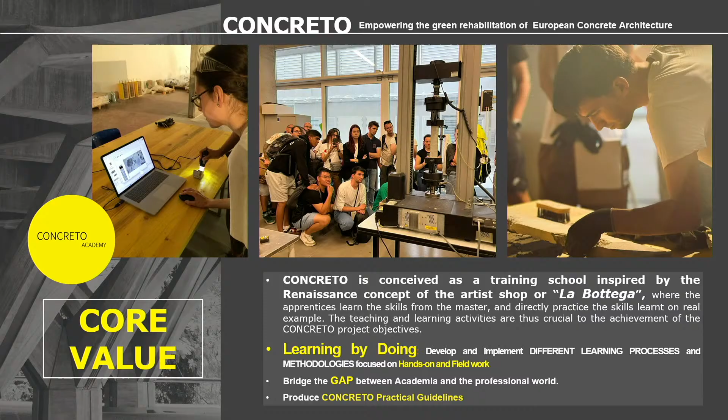The background, as Elisabetta and the previous speaker, who gave a really nice welcome, hinted, is why we decided to develop this project. On one end, we were moved by the safeguard and protection of modern architecture, modern heritage. On the other hand, responding to urgent European policy to renovate and work with our existing built environment, and simply because we have a very large portfolio of concrete buildings and concrete infrastructure that are getting older and are in need of our help.

Nobody can deny that this unique man, the work of Pierluigi Nervi, has indeed been one of the main inspirations of this project. It certainly brought me back to Italy from the US to work on Nervi, so I think for me, it did the trick. Nervi left us an incredible legacy.

The foundation was established in 2008 by Marco Nervi, who is hiding in the audience - we will point him out in a little bit - and indeed Elisabetta. Over the past two decades, they've really worked hard to promote, protect, and preserve Nervi's work, but not only that.

Since we are in Spain, I couldn't resist honoring and showing my admiration for another great visionary and engineer, Eduardo Torroja. It's a very hard pick. When yesterday we went to see the Ippodromo La Zarzuela, I really felt I was cheating on Nervi a little bit, because it's really hard - genius at the same time, but in different ways. Definitely they have both contributed to our concrete architecture in incredible ways.

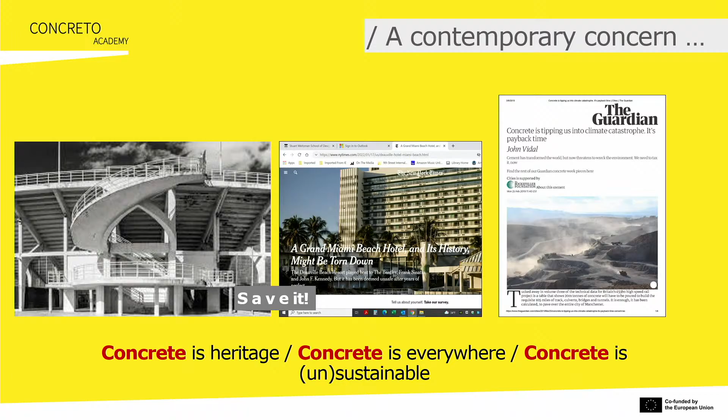Despite the great progress we have achieved in the last 200 years since the introduction and patent of Portland cement, which we celebrated in 2024, concrete technology has advanced greatly as a material that has really allowed us to build our cities significantly. But it's still very disappointing when we look at the stats on how we are doing with our interventions in terms of repair, durability, and performance.

I think in this audience we can fairly say that we can split the blame a little bit between the design professionals and the people that actually do the work in the field.

For this reason, we reflect that working with this material, although very economical and very versatile, requires a very specialized set of skills. It's artificially made, it's made in the field, which on one end gives us incredible opportunity, but on the other really underlines - and is always a good reminder - that it relies a lot on the quality of craftsmanship. So it's very important, as we are faced with intervening in this architecture, to think about these types of specialized skills.

So here we are - after this bit of background, this is what has really been the goal behind this project: to bridge the gap between practice and research, to give a practical approach, to show how things are done, to allow professionals that specialize in designing intervention to really have an opportunity to see what it takes to do a patch repair, which is still today quite a challenging task.

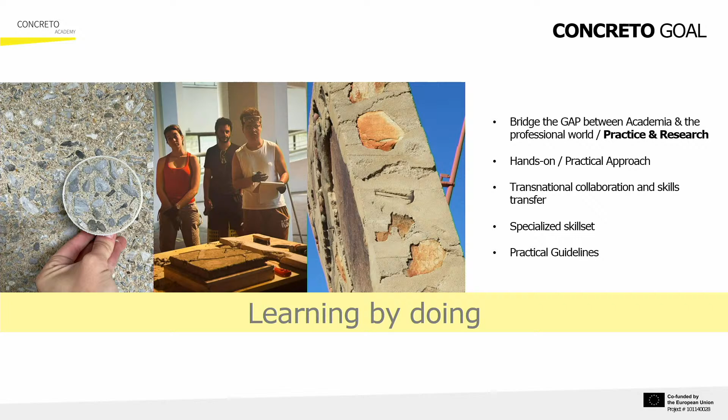All the teaching and training activities of Concreto revolve around what we call the 5 skill pillars of knowledge - the A to Z of what it takes to work with existing concrete structures, starting from concrete assessment and then moving along, touching upon all the different types of techniques.

Who participates in this, who takes part in this project - they're all sitting in this room. There are students from architecture and engineering schools. There are students from VET organizations, craft schools, who are going to be the technicians in the field of tomorrow. And then there are young engineers and young architects who are already working in the field.

The Concreto journey, as we refer to it, is a one-year program. We are not meeting every day - it's not a continuous 360-degree concrete full immersion. We have 3 appointments during the year. We start with an online introductory training where we first get to know one another, and introduce some of the big challenges and main topics through case studies. This year we started in January. Then we are here now.

We are about to complete our Master Your Skills, the 8-day hybrid learning. Last year we were hosted by our partner in Milano, at the Polytechnic of Milan. This year we're here in Madrid.

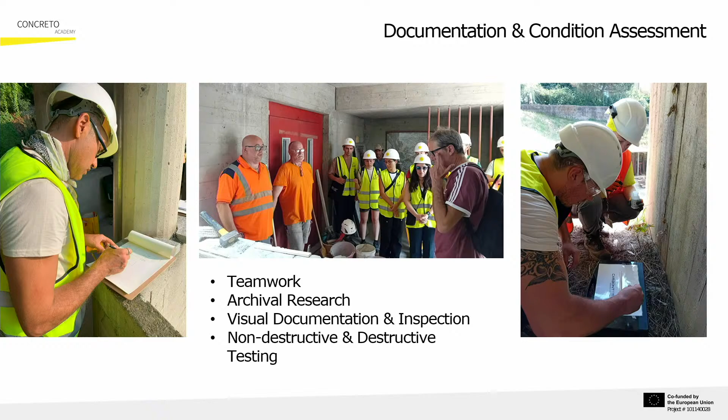As we mentioned, the activities are all hands-on, all field activities. These are some photos of the work they did at the building. They start from archival research, and then they were assigned different parts of the building to identify how it was built, continuing with some of the most common diagnostic testing usually done when working with concrete.

After spending a week in the sun, we brought them back inside in the laboratory with no air conditioning, where we started going through the basics of how concrete works and making some concrete - what it takes to change ingredients, and how difficult it really is to work with this material.

We also put Marco to work, as you see here. We had to have a kind of blessing from a Nervi before we really got going.

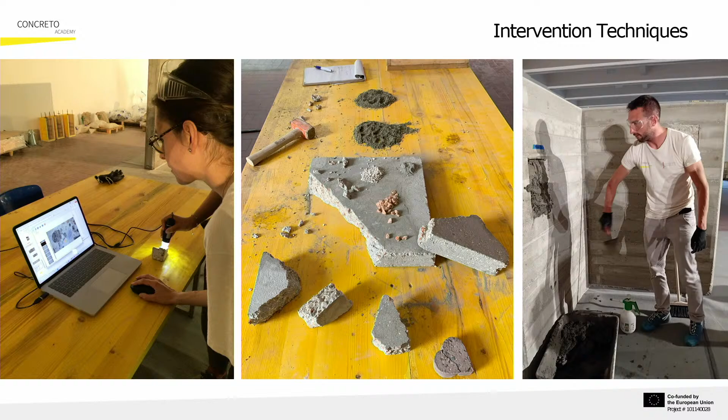These are some additional exercises dealing with how to match and work when replicating historic concrete. Here we have Matteo trying to perform a patch repair, which I think he can now confirm was not a really easy task.

We also touch upon electrochemical techniques and so on.

So in the end, the sustainability of this project - it's a 3-year project, we are in the 2nd year, with one more year to go. As an end goal of these 3 years, we have the publication of practical guidelines referring to different types of intervention and assessment for concrete, and also the production of short online massive open online courses that will be on an open source platform. The future is also to continue, to be able to independently continue this as a training institute.

We should maybe mention the code book that will be coming out. Yes, we are also very, very close to publishing one of the first products - a research state-of-the-art and literature review that was done from the start of the project, trying to really understand the gaps, what we are doing well, what we are missing. Of course we have to call out Guido from Docomomo, because they were leading this effort and have done a really great job.

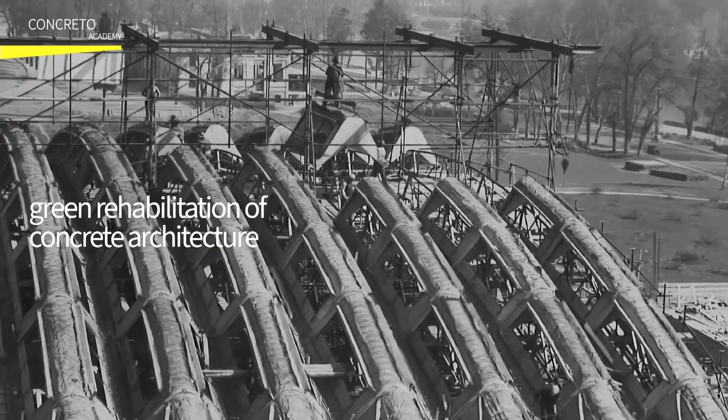Concreto is an alliance for enterprises and education project under the Erasmus Plus program, launched in January 2024. Led by the Pierluigi Nervi Project Foundation, the Concreto Consortium includes 13 partners from Italy, Spain, Belgium, the Netherlands, and Turkey, comprising higher education institutions, vocational training organizations, national trade associations, and modern heritage organizations. The project draws inspiration from Pierluigi Nervi's architectural legacy and focuses on developing skills for the green rehabilitation of concrete architecture.

Inspired by the Renaissance idea of the artist shop, La Bottega, Concreto is conceived as a training school combining theoretical learning with hands-on practical experience. Each year, Concreto brings together university students, craft workers, and young professionals to learn and collaborate, aiming to bridge the gap between academia and the professional world.

Concreto identified 5 skills pillars of theoretical and practical knowledge for professionals to master when engaged with the rehabilitation and regeneration of our concrete buildings. The teaching and training activities are organized in 3 sequential units around these 5 skills pillars, as Concreto workshops intended to link education with practical sessions.

Starting with the Concreto Stepping Stone, then followed by the Concreto Master Your Skills, and ending with the Concreto Masterpiece, the final summer school with 100% hands-on fieldwork experience, which will take place at the UNESCO site in Ivrea, Italy. The Concreto Academy supports a two-way approach of principle and practice, promoting smarter and greener renovations to ensure the safeguard of our concrete quality architecture.

The Concreto Academy seeks to equip today's professionals with the skills needed to become tomorrow's experts in sustainable building practices. And remember, our European concrete quality building stock is a non-renewable common good, whose preservation and empowerment are the responsibility of society as a whole.

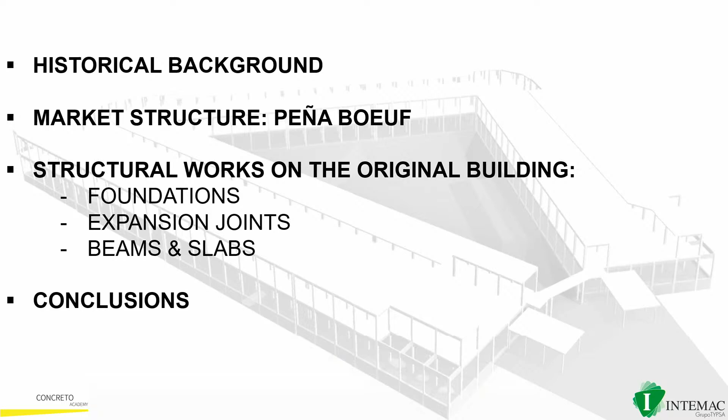We have to go to Madrid in the 1920s, 100 years ago. You've been 8 days in Madrid, so you already know where Puerta del Sol and Atocha are. In the south of Madrid it was still a suburb, and the city council decided to build wholesale markets where neighborhood markets could buy their products. The most known of them is the slaughterhouse, the Matadero, which you've probably visited, close to the river.

Close to it, there was a site of the city council with a triangular shape because of the railway tracks, and it is here where the council decided to build the market.

The Matadero had been built in a regionalist style, using stones and bricks to make arches, etc. But the architect, Javier Ferrero, decided to change this completely, and he used concrete to build the new market. He also decided to use the space in a very functional way, placing all the buildings on the edges of the triangle, leaving a huge square in the center where sales could be done.

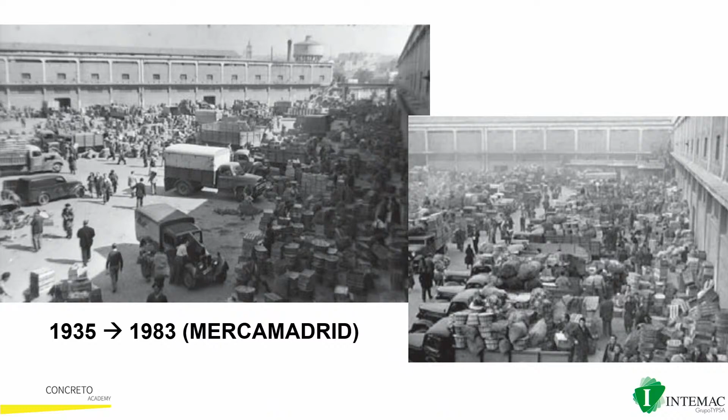It was in use from 1935 until 1983, when a bigger market, Mercamadrid, was built. From then until the beginning of this cycle, it was abandoned, and many damages and problems arose. The city has been growing, and now that suburb of the 1920s is a center of leisure and culture in Madrid.

I already mentioned Matadero, but there are other places for leisure and culture too. So it is important that this building have a use. It is very important because I live here, so it's good for me.

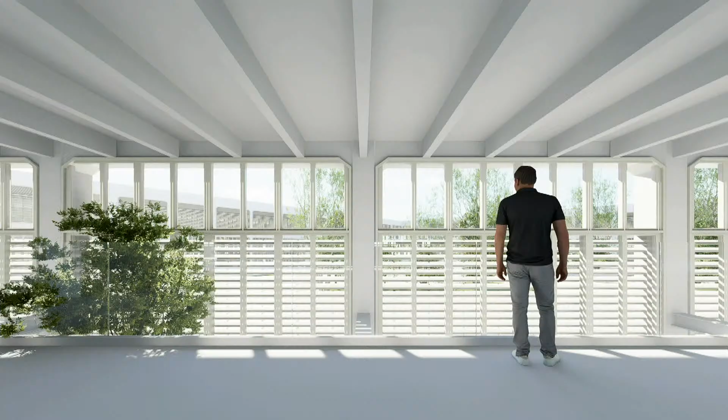The idea of the project is to maintain Javier Ferrero's concept of the great square in the center and the buildings on the edges. Here are some views of the rehabilitation now in course, and as you can see, the structure is maintained, the same as it was 100 years before. Some views show the new uses as well.

A question arises: it will cost 100 million euros. Somebody could ask if it is worth this investment. I have no doubt, and in this context nobody doubts, because of the sustainability and heritage values that this building and this architecture have.

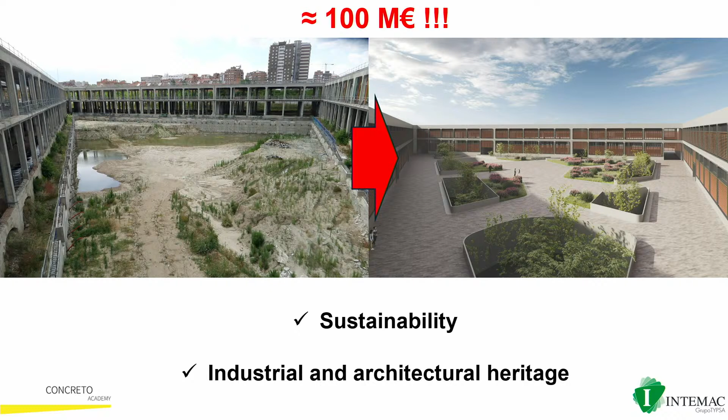But let's go to the structure — we have to go back to 1931, when the market was designed. It is interesting to see that although concrete was already a consolidated material, the structure is very similar to those of Hennebique from the end of the 19th century, with those frames, the forms where they meet the column, rib slabs, etc. They are very similar structures.

Of course, those patents had already been surpassed, and structures like those of Freyssinet or the roofs by German engineers had already been built. In fact, Le Corbusier had published on the new architecture and concrete, and had embraced concrete also for architecture.

In Spain, the situation was quite similar. At the beginning, we used patents mainly from France — Ribera was the engineer who introduced most of them. And from 1910, concrete was taught at the school, at the Polytechnic of Madrid.

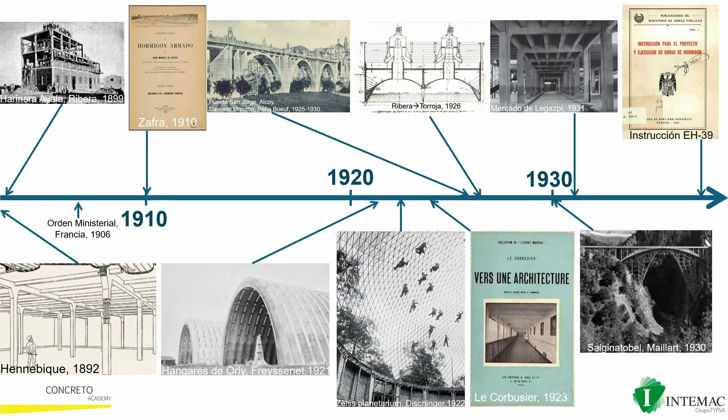Alfonso Peña, that I mentioned before, was a civil engineer. He had teachers like Zafra, who was the first teacher of concrete in the Politécnica de Madrid. And when Zafra died, he took his chair of concrete. He published many books that have been a reference for many engineers in Spain, but he didn't have many projects, though he imagined many projects.

He wasn't known for it, but he was a dreamer. It surprised me when I studied him for the first time that, for example, in the 1930s, he already dreamed of a bridge over Gibraltar, which surprised me. Another interesting fact about Alfonso Peña is that he was the Minister of Public Works in Spain after the war.

Today, Carlos Polimón, who is an expert in bridges in Spain, is not going to speak about bridges, so I'm going to tell you about a curiosity of Alfonso Peña: in 1932 he designed an aqueduct in the north of Spain, in Tardienta, but his partners didn't like the design, and they had doubts about its security.

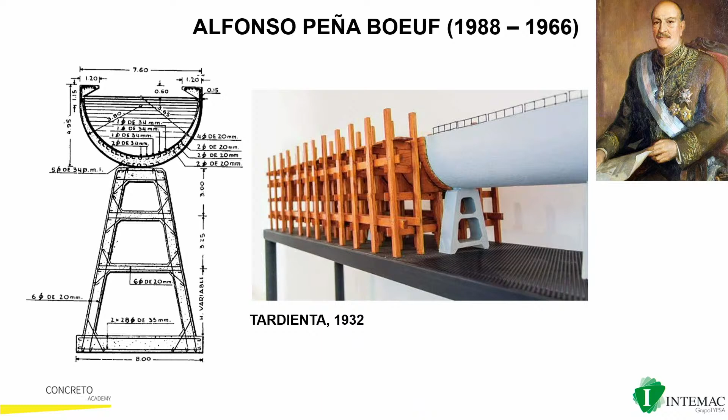He made models to prove that it was correct, but because of the war, this project was stopped. After the project resumed, they made some proof loading and checked they were right, so they could build the aqueduct, and it was the Minister who inaugurated his own work, which never happened in Spain.

This structure is very similar to that of Torroja, at Alloz. This other one is much more elegant, but maybe Alfonso inspired Torroja in the beginning.

Let's go back to the market. It's a structure, and as you can see, it is very robust, mainly in the central corridor where vehicles had to go to distribute the fruit or whatever. In the roof, there were these canopies, which are 6.5 meters - it's quite a lot.

In fact, the first time I had to check the structure, I didn't know how it worked, because I didn't think an engineer then could design this by torsion. But it wasn't like that - he designed many reinforcements by torsion to resist this canopy.

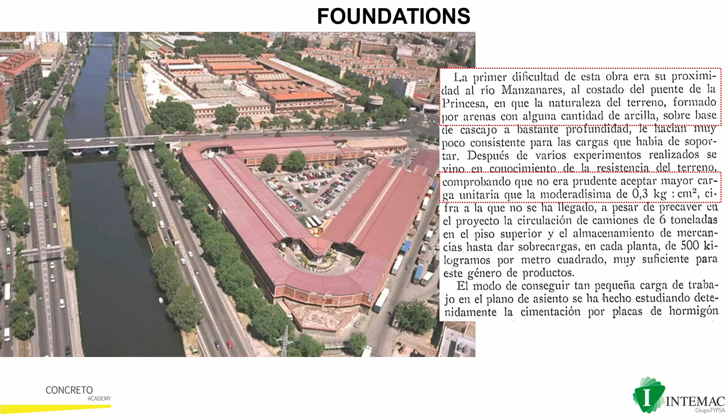But the main problem of the market for which the restoration has been carried out is the foundations. As I mentioned before, and as you can see in this picture, the market is close to the river. Alfonso Peña knew the soil was not so good, and in fact he designed troncopyramidal footings so that the tensions in the soil were low enough.

Despite this precaution, many damages appeared in the facades and also in the structure. I don't want to be very technical, but I can't resist explaining some of these damages.

For example, these ones. As you know, at the end of a frame, you have negative moments that compress the bottom part of the section. So in the beginning, it is not necessary to have any reinforcement in the bottom side. But every code recommends or establishes that you have to put a quarter of the reinforcement of the bottom into the column. This is because you can have a change of the moments, for example, because of settlement.

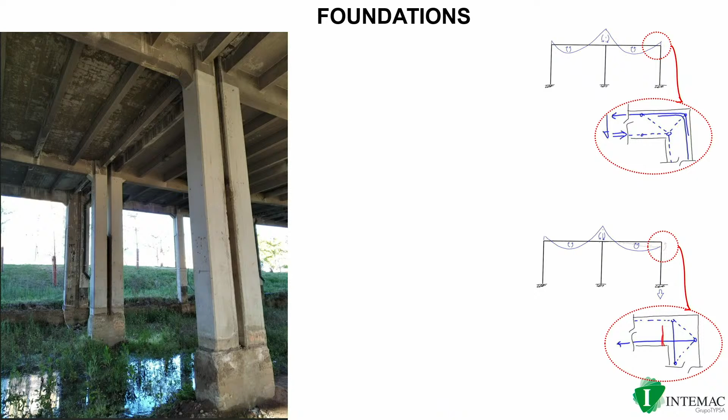And here it's clear: if you have a settlement, positive moments will tension the bottom reinforcement that you need at that point. If you don't have it, or in this case you have it but it's not enough, great cracks appear, and they had to be treated.

Because of this kind of damage, and because of the new uses and new floors in the market, underpinning had to be done in all the foundations. It was decided to do it by micropiles, and the problem of this kind of intervention is taking the loads from the column to the micropiles.

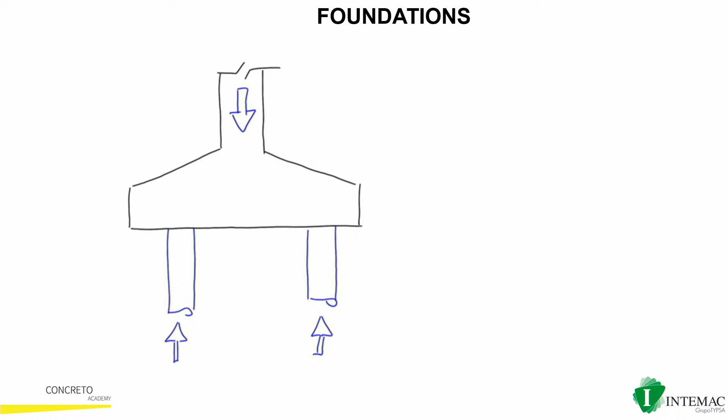In the beginning, if the loads are not too big, we can do it inside the existing footing. It means we have to check that the bond between the micropile and the footing is high enough, and that the tensions generated in the footing are also low enough. This was not the case in most of the footings of the market, so another solution had to be found.

As there was no problem of height over the footings, we decided to make caps over the existing footings. But the problem is the same: we have to take the loads from the column to the micropiles. And to do this, we have different mechanisms.

The first one is just shrinkage. Because of shrinkage, there will be compressions against the column, and this will improve the bonding between the column and the cap.

If we don't trust in this shrinkage, we can analyze the reinforcement. We can place it analyzing shear friction, which means that when the column tries to slip inside the footing - the cap, in this case - the reinforcement will be in tension, which means there have to be compressions against the column, okay?

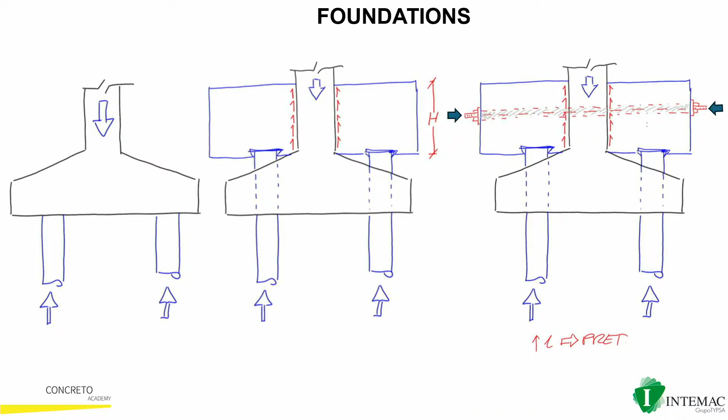If not, another solution is to pre-stress that cap. And this is the only solution in the case of the facades, as you can see here. I don't know if you can see the point, but here is the existing footing, and this is the new cap that is pre-stressed, so that there is compression that improves bonding.

This solution was also used in the interior columns. Here you can see the execution of the micropiles, the placement of the reinforcement, concreting, and then pre-stressing.

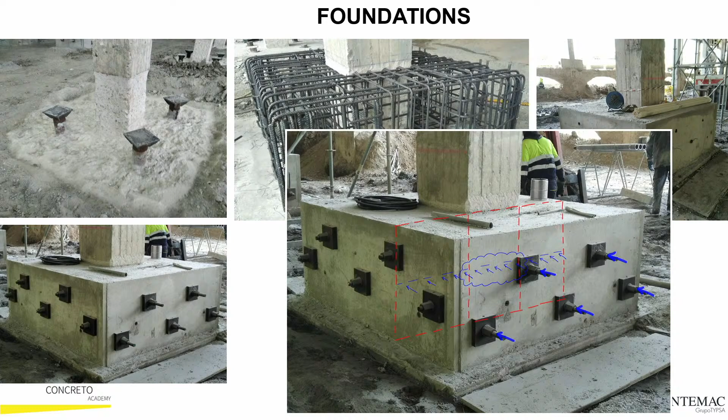Here another gap arises, because once you pre-stress, you don't know what you are pre-stressing. What you want to do is to pre-stress the cap against the column, not the cap itself. But, well, they decided to do this, and as other mechanisms work, it's easy enough for us.

These interventions meant 15 million euros. It is a lot, but it is not so much if we compare it with the amount that the Council wants to save because of the booking or renting of other buildings. All the people will come here and they won't have to rent other buildings. Another interesting intervention was the closure of the joints, which was a problem in the market.

Here you can see two cases of joints that were very badly resolved, and in fact it's difficult to understand how this didn't fall before. Probably because these beams were supported by other elements, probably facades or something like that.

In other cases, in most cases in fact, expansion joints were resolved by doubling columns, and the configuration was right, but because of the problems of the foundation that I mentioned before, there were some cracks.

In both cases, we decided to eliminate the joints and change the structural behavior, placing new reinforcement on the top side of these elements, so that this new reinforcement will work against new loads.

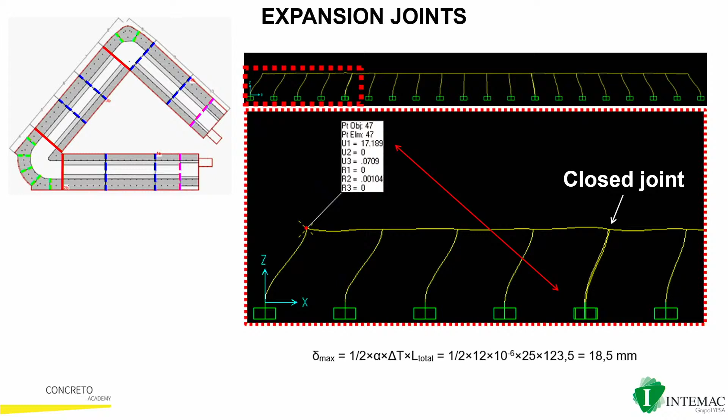And it is because for very low change in temperature, the supports will crack. This means that the stiffness of the column will be reduced, and it allows for the deformation.

In fact, the moments in the supports were very low, and as they have a lot of ductility—because the loads are very low and the amount of reinforcement is also very low—the ductility was enough, and there was no problem because of closing the joints.

Regarding the beams and the slabs, when closing the joints, they are now in tension, but the stresses were very low, and there was no problem. At the point where we are closing the joint, of course, we have to place new reinforcement, but as you can see, it is not very much, and it was easy to place.

Here is a detail. I don't want you to understand and see everything, but it is interesting. Well, this is the detail, the two columns and the new reinforcement, and other reinforcement needed because of the other things.

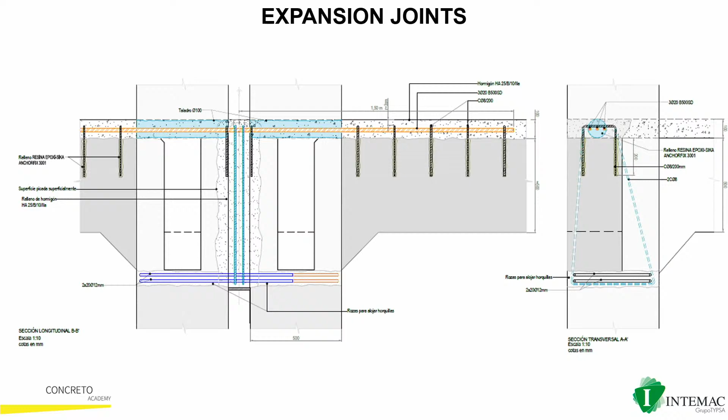But the interesting thing about this image and also these photographs, where you can see the hole in the column and the placement of the reinforcement, is how this kind of work is done—it implies very specialized skills, as Irene mentioned before. And that's why I wanted to tell you about it.

Finally, I wanted to talk about beams and slabs, where the problems were mainly corrosion problems, durability problems, but also fire protection—security in a situation of fire.

I'm not going to speak about corrosion and durability because we have Carmen and Carlos after me, but I want to point out that in the assessment of existing structures, it's very important to distinguish from existing codes, because design codes establish requirements of geometry and covers that probably an existing structure cannot meet.

So we have to do a performance analysis to check if security and functional needs are compliant or not. In this sense, I want to show you the situation of the ribs of the market against fire.

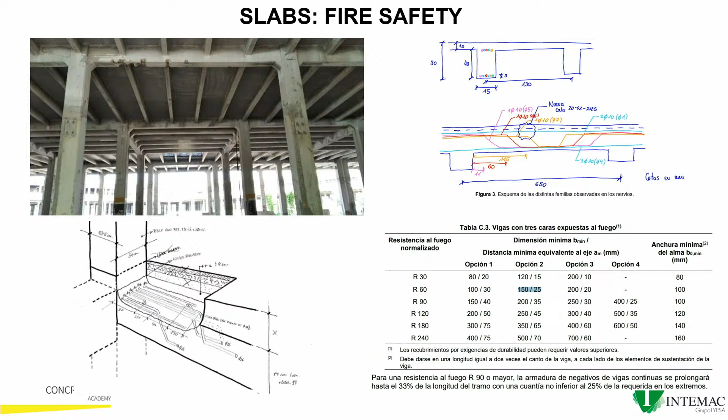As you probably know, when you heat an isostatic beam, it will have a deflection, and the moments will be the same, no change in moments in the beam. But if this beam has continuity over the supports, this deflection is not free, and there will be negative moments that increase. That's why in design codes, there is a requirement that the length of the negative reinforcement must be longer than in other situations.

To analyze this, we can have the isotherms in the section, which are the temperatures for a fire. Including these temperatures in the section and in a model, we can see how the negative moments are increased. But we are doing something wrong, and that is in this image, we are considering that concrete is the same as in design, no changes because of the high temperatures.

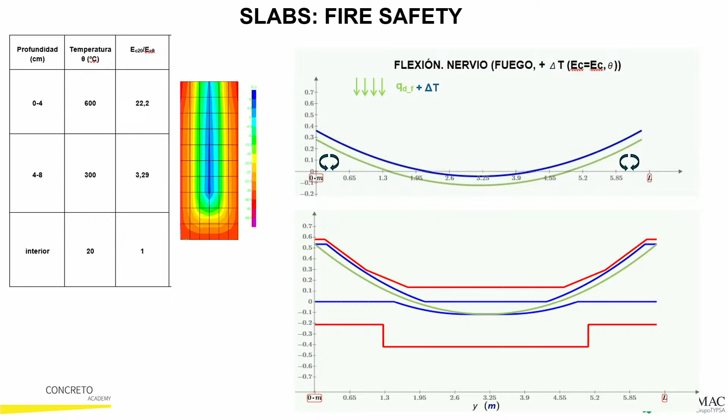Just to finish, some conclusions. The first one, the importance of understanding and respecting engineers, people, architects that have been before us in the works where we go.

Second, the best reinforcement is no reinforcement. It's better to analyze it, better to try to avoid reinforcement.

Another conclusion is that in many interventions of this kind, the problem is not to assure security. The problem is usually linked with functional requirements and durability problems.

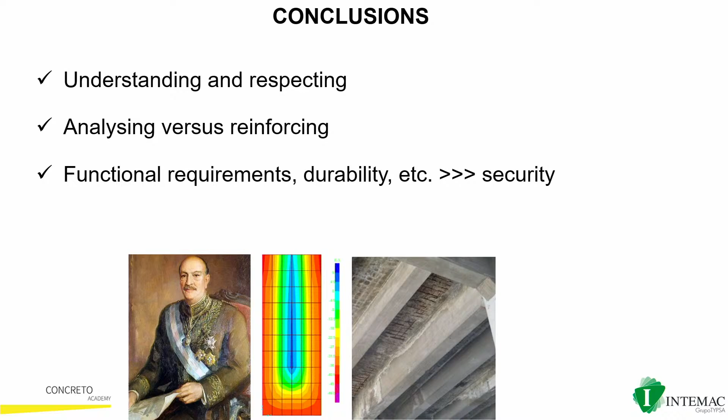And finally, we have to take into account that this kind of works are living projects. We can try to make the best project to make the restoration, but always there will be things during the works that will surprise us, and for that we need to be prepared.

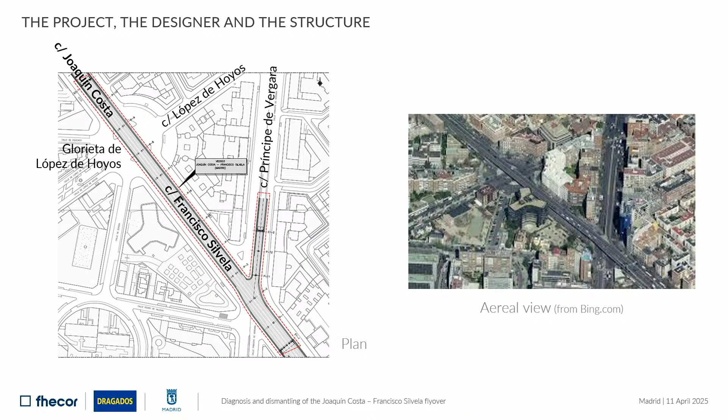Should you have any doubt about the construction of this bridge, you can ask that engineer, Jesus Rodriguez, who is there. Jesus, please, he was working here in the construction of this bridge. So you can ask anything, any doubt you may have.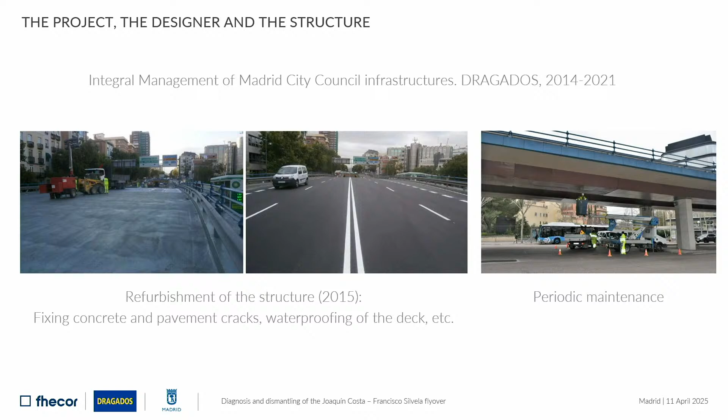Our intention was good, but I'm afraid it was too late, because the bridge was ill. We realized that a few years later. Now Javier is going to explain what happened with this bridge going forward.

Thank you, Juanje. Thank you, Esther, for your presentation. Thank you, Leonardo, for the invitation to participate here. You are responsible for any disaster that can happen.

The designer was José Antonio López Jamar, a very good engineer, perhaps not as well known as others, but very, very good engineer.

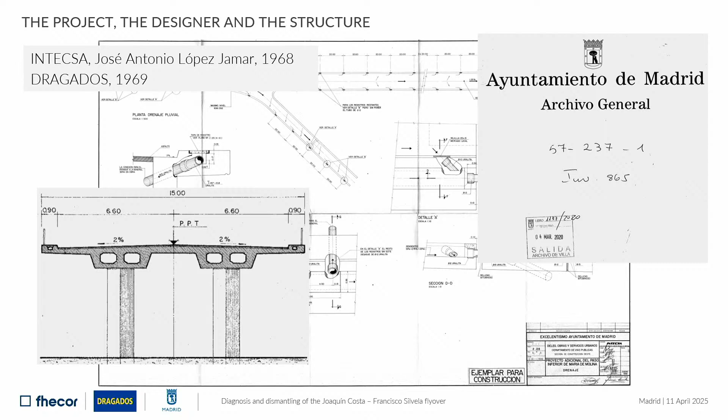The information we gathered, we made a clinical history of the bridge beforehand, exactly as medical doctors make with their patients. It's very important to study and look for the story and to analyze it. Indeed, as Juan said, the structure is very slender, 1 meter in total depth. The slenderness is quite important, beyond the normal standards of that time even.

The designer followed the Spanish standards of that time, and regarding pre-stressing concrete, only the French regulations available at that moment. The technology used at that time was the best one. The project was developed in 1968, construction started in 1969. At that time, human beings were on the moon, so the technology was very important. I would say it is normal, it's a current bridge from this point of view.

It's a plan showing the layout of pre-stressing tendons, some anchorages here, but it's important to say this was made in just 1 meter 20 centimeters height. So it was very difficult to ensure and provide this geometry, those voids you see here, with wood formwork. It was really difficult, it's necessary to recognize this situation.

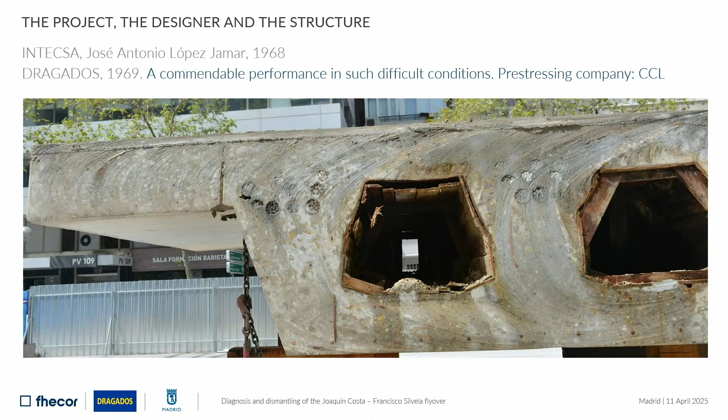Another example, this is a cross-section during the dismantling - dismantling is the fine word to describe demolition. Demolition is a bad word, a sad one, but as Sigmund Freud said, you cannot avoid having a bad government, you cannot avoid having health problems, you cannot avoid having students in schools who fail. It is good to fail, otherwise some students could be a public danger in society. So it's important to bear in mind.

This cross-section is one of many that were carried out. You see some voids there, and also the displacement of the strands within the sheathing, showing that some problems had occurred in the past.

All the detail of the top tendons on the support area.

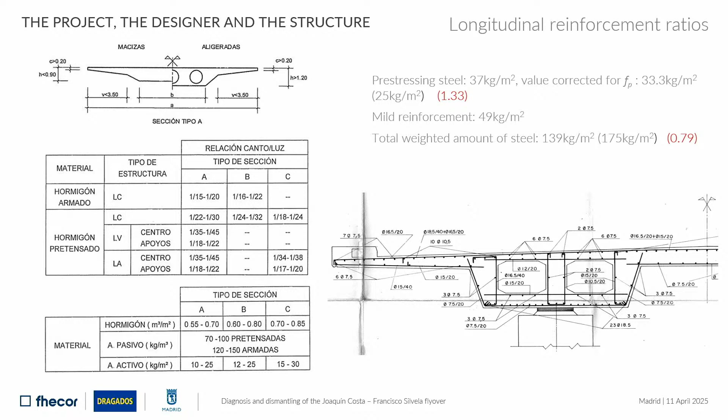It is important to say that the amount of pre-stressing steel was very high. The criteria at that time were very different from the current criteria today. So the excess of pre-stressing was about 33% in comparison with current criteria. On the contrary, the amount of mild reinforcement was reduced, 20% lower than today, and yes, it had some consequences.

The detected problems occurred throughout the history of the bridge. The bridge lived for about 50 years. 50 years is exactly the time that codes ensure in the main frame of the safety formats. So it accomplished the situation, although, as Juan said, it was too young to die.

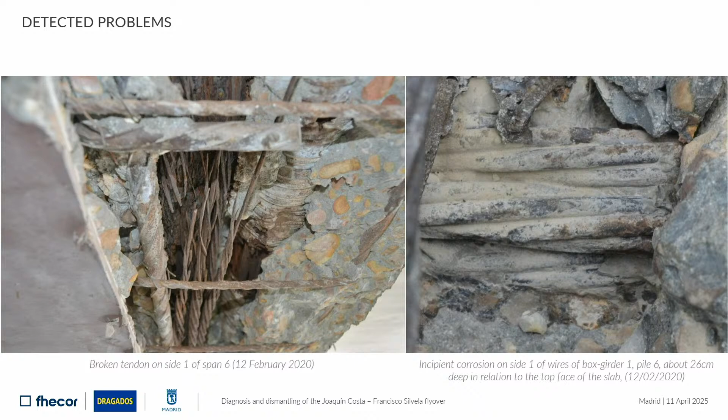This crack happened all of a sudden. This is important to say. We opened a trial pit to discover the inside part of the tendon, and we observed that this tendon was broken. And in other positions, on the top part, we detected some incipient corrosion on the wires of some strands.

After analyzing the history, after making visual inspection, as medical doctors do, we made analysis. Analysis and conclusions of the clinical history are the best basis to formulate a good diagnosis. This is very important for young people.

We discovered that about 10% of the tendons could have corrosion problems. Some others would have been endangered by the lack of grouting, so those tendons were not protected against corrosion, and indeed they had collapsed. We took some samples of this tendon.

I took it with my bike. I moved my route by bike. This is an example of sustainability.

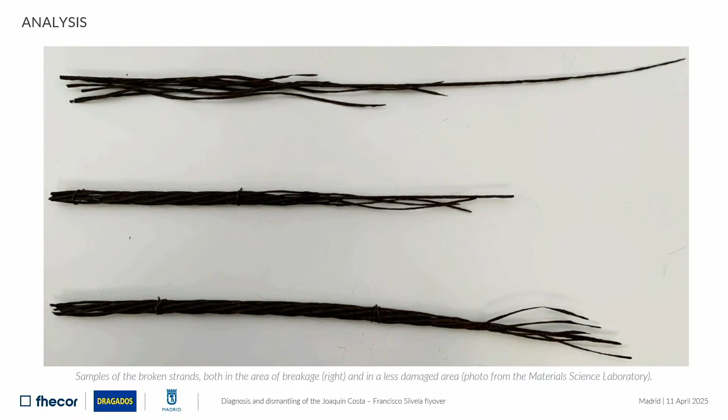I went to the school and brought these samples to my colleagues in the lab. And they analyzed the problem. They detected that the central wires of this strand behave in a ductile way.

This is important, I will show you later on a diagram. But the outlying wires exhibited corrosion with less section and another type of corrosion. From a mechanical point of view, central wires behaved ductile, but the outlying wires behaved with brittleness. This is very bad because they have severe consequences on the safety of the structure.

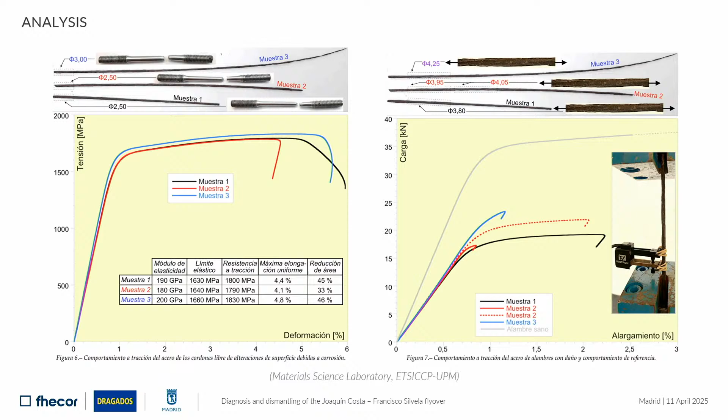You can think that it is typical of old steels. Steel was not that old, first, and second, today the same thing can happen.

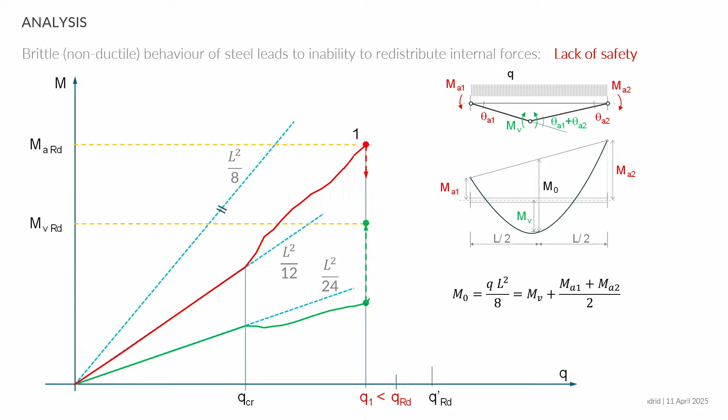So this corrosion was the most important concern of the team there. But it was not the only one. We analyzed also concrete, and we observed, with the help of Intemac, that some samples showed systematic cracks in the gravel.

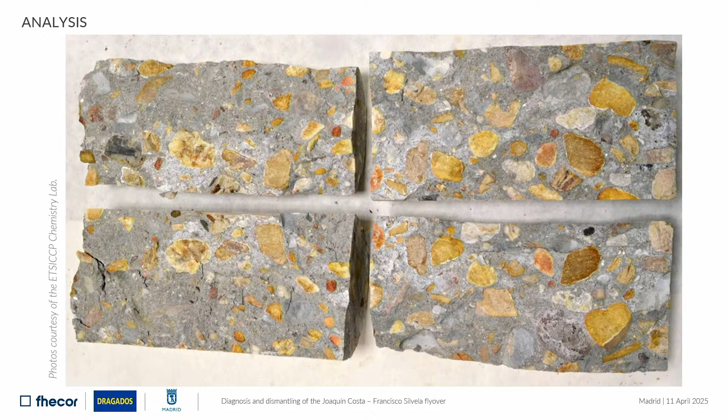The reason why rubble was broken is that every element was submitted to the so-called Brazilian test. You probably already know that on the central part of this specimen, you have a tensile force, pure tensile force. On the top part, you have compression, and due to the difference of elastic modulus of mortar and stone, the mortar is compressed, like the top part of the rubble, but the rest is broken.

So concrete is not characterized by the characteristic strength. It's necessary to deepen into the analysis, to analyze the microstructure or the mesostructure of the concrete. This is also a lesson to be learned.

The design strength of concrete in 1968 was 400 kilos, 40 megapascals today. But the test carried out with samples taken from the bridge showed less than half, 18 megapascals. Average value, less than 30. Elastic modulus, less or about half of the theoretical results. It was difficult. Much more important, a matter of much higher concern was the concrete properties, the dangerous concrete properties, than the corrosion of steel. So the bridge of prestressed concrete was in severe danger.

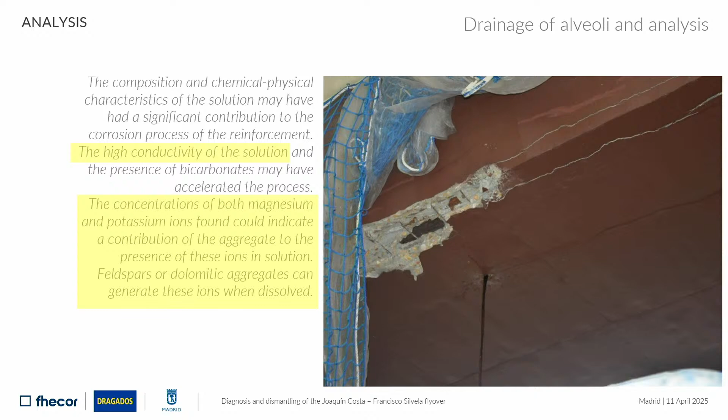We analyzed this water, and we came to the conclusion that it was an accelerator of corrosion, because it was very bad for the structure. You can see here very clearly how this surrounding spot, white spots, showing the reaction between alkali and the aggregate.

As mentioned, the load-bearing capacity was very endangered from the point of view of the resistance. It was interesting because the logical conclusion is that if a bridge has deflections, it's probably due to the elastic modulus being reduced. But the structure was perfectly aligned. You could still see the camber, the pre-camber that they probably provided during construction. So the visual inspection and the experimental results became contradictory.

Even more so if you take into account that deflection is obtained according to this formula. You already know that. So deflection depends on the inverse of the elastic modulus. If the elastic modulus is divided by 2, deflection should be twice, double - but not.

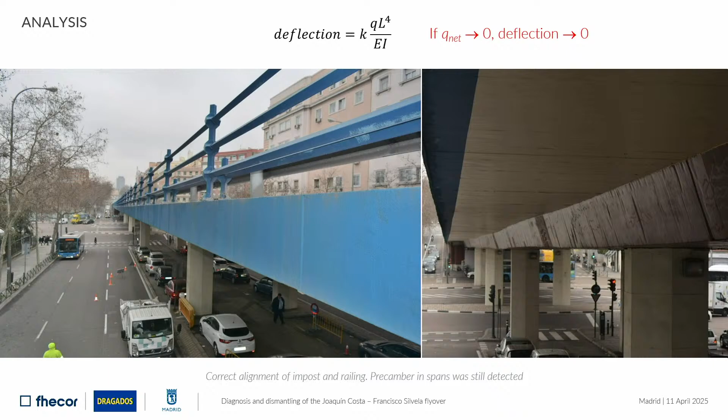The bridge had not experienced deflections. Why? Because on the top part of this formula, you have Q, the load, but the net load, which is the sum of the external load, self-weight, permanent loads, and so on, plus the loads induced by the deviation forces of the pre-stressing. This was almost zero, because at that time, by the end of the 60s, beginning of the 70s, even in Spain till the beginning of the 90s, the pre-stressing criteria was to provide the structure with as big an amount of pre-stressing as needed to ensure that under permanent loads or service loads, no tension appeared in any section. This is a consequence of the already mentioned excess of pre-stressing.

To shorten my part of the presentation, we analyzed the structure. We obtained very high values of stresses. The important thing is that the compression stress in concrete was higher than 45% of the real value of the load-bearing capacity of concrete. It means that concrete was undergoing nonlinear creeping. So the deformations were increasing a lot.

So we analyzed the internal forces, we compared, we analyzed the safety factor, and we came to the conclusion that the situation was unacceptable. The bridge had completed its lifespan. The bridge was dying, and it was always a safety problem for users. So although it was a very interesting structure, although it was a piece of the heritage of Madrid, the bridge had no solution. Sad conclusion, but true conclusion.

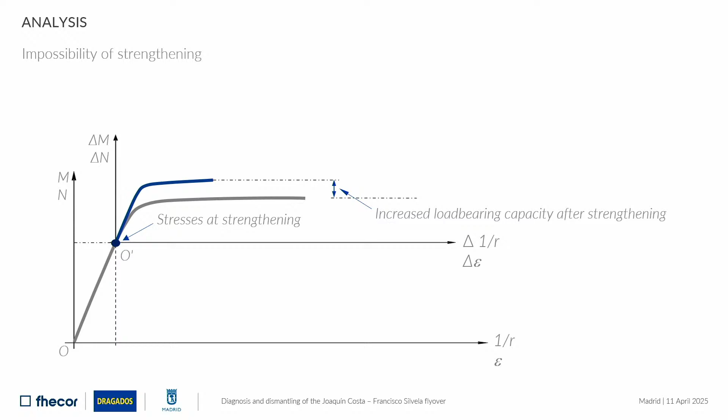It was not possible to strengthen it. It was not possible, since this is a normal situation for strengthening - you're strengthening not with zero loads, because a structure is not possible to be free of charge, of loading I mean. The real situation was here, so the additional capacity of concrete was almost zero. There was no margin for strengthening the bridge.

After history, after analysis, diagnosis. Diagnosis is the conclusion, when you say what are the origins of the problems and what are the consequences. Well, I am going to be very quick with this.

Avoid masking paint. This is very important to make a proper diagnosis, very important. It was a mistake in the past, it is easy to say - I would have made the same mistake. It's easy to say that if you see cracks, but the bridge seems to be in good condition, you paint, you avoid the criticism of other citizens regarding the cracking, and the bridge can continue. This is a mistake. You have to make a diagnosis, like medical doctors do with you, exactly the same. Drain.

It is a fact that the number of chemical attacks are increasing. Alkali-silica, alkali-aggregate reactions are quite frequent today, because although the problem started many years ago, 40, 30, 50 years ago, many problems appear today.

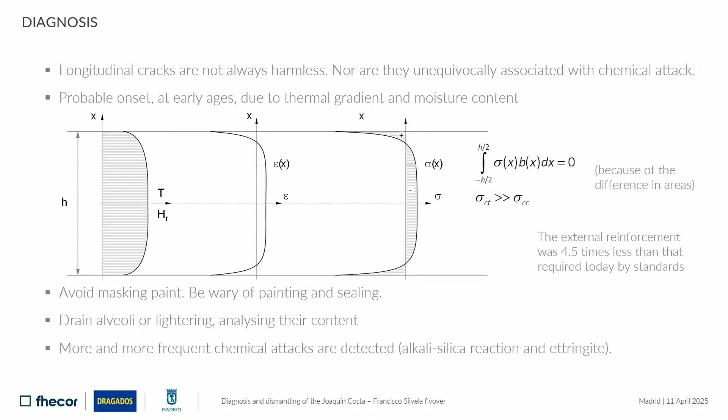It is important to know the history. If you analyze the construction type of a bridge, you can detect if it belongs to an at-risk group or not. Bridges erected till 1990, more or less, especially those with pre-stressing tendons produced till 1970, are especially submitted to this risk. This is important to bear in mind.

And another conclusion that I will... forgive me.

So unfortunately, we had to dismantle this bridge, and then the Madrid City Council, our client, ordered us, Dragados, to dismantle or demolish it.

This work had a lot of boundary conditions. One of them: it was an urban bridge in the middle of the city, in a very busy area with a lot of streets. There are also a lot of tunnels and galleries under the ground, which conditioned the demolition too, as we will see later.

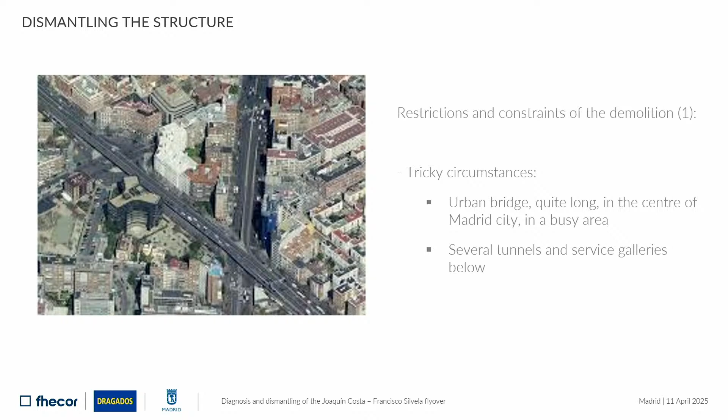Of course, these works had to be done very quickly, because it's very annoying work to carry out in the middle of the city, so we had to do it as quickly as possible while trying to minimize the annoyance for people, the neighborhood, traffic, etc., and to reduce the production of noise and dust.

We had an advantage. All this happened in the summer of 2020, during the COVID-19 pandemic, so traffic was at a very low level, much lower than today or before.

And as it was emergency work, our client told us we had to demolish the bridge immediately. There was no design, no drawings, nothing. So at the same time we demolished the bridge, we made not a design but an action planning, a living document, which was more or less a design.

This document was made by Fhecor, by Javier León and his team. A very good work, by the way. And so we started to demolish the bridge.

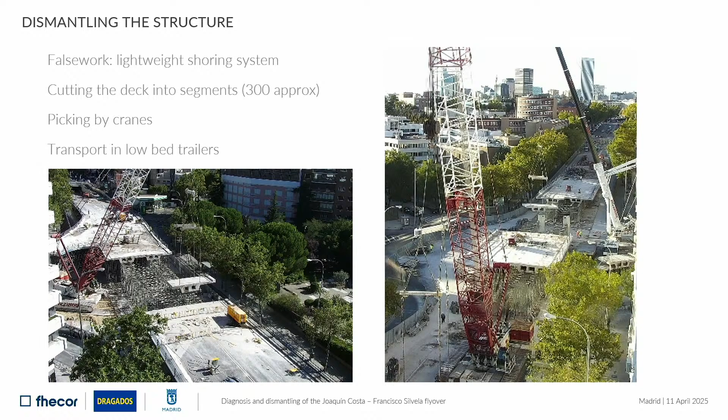Some details about this construction, or rather deconstruction. The falsework which supported the bridge is similar to the one probably used 50 years before to erect the bridge.

Then we cut the deck. We cut the deck by means of machines with diamond wire, which is a good method, not very noisy, and which permits cutting the pieces of concrete.

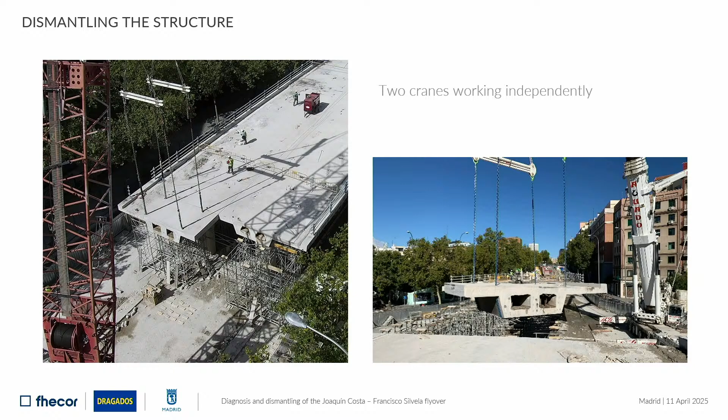After the deck is cut into pieces, two independent cranes take these pieces and put them onto low bed trailers. Here we have a piece on the trailer, and on the right side we can see the trailer taking the piece away, carrying it to the facilities of a company specialized in processing construction and demolition waste.

Why 3 meters wide? Because 3 meters is the limit between a normal transport and a special transport. Special transport means the piece is very wide, so it's necessary to circulate through the city at night, escorted by the police.

However, if it's a normal transport, not very wide, the truck can go at any time of day to carry out pieces, with no police and not working at night, so no noise at night. Imagine the cranes operating and taking pieces at night - that would be worse. So it's better to work during the day, not at night. That's why it was necessary to use normal transport, 3 meters wide - very important to not increase the annoyance to people.

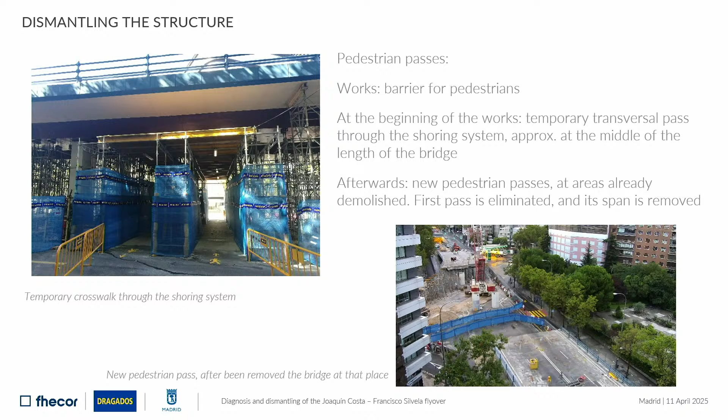This you can see. We have another pass, so we can demolish, eliminate this, and demolish this span.

When we started the demolition, we discovered that there were these ducts made of asbestos fiber cement, a very dangerous material. So we had to take a plan to cut these pieces, these concrete pieces, trying to make as little dust as possible, and to process this part of concrete with asbestos inside.

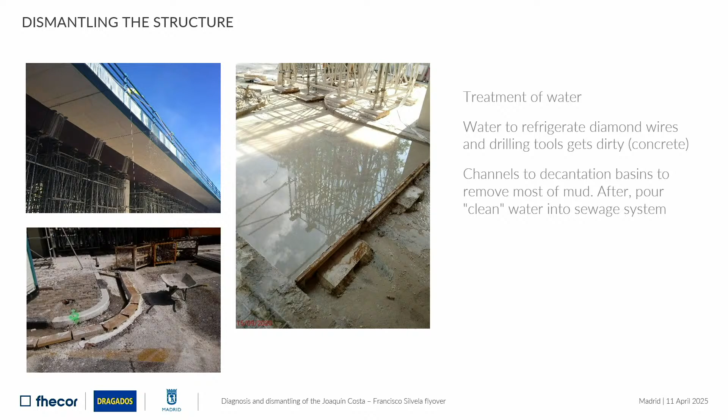Well, and what about the date? We had to do this very quickly, and I think we did it, because we spent 103 days to make these operations, around 3 weeks less than planned. And we think that the neighborhood was not very angry with us, because they didn't make a lot of noise about it.

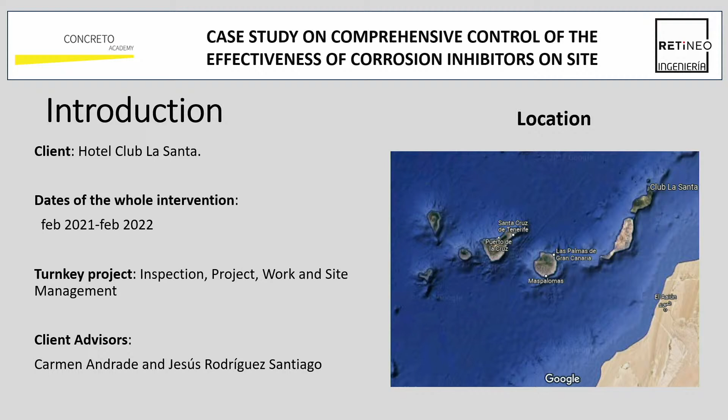In addition, they house the Iron Man of Lanzarote. I don't know if you are familiar with this kind of sport. They host the Lanzarote Iron Man, and it's one of the most known events for this kind of sport in the world, and it's very hard, in fact.

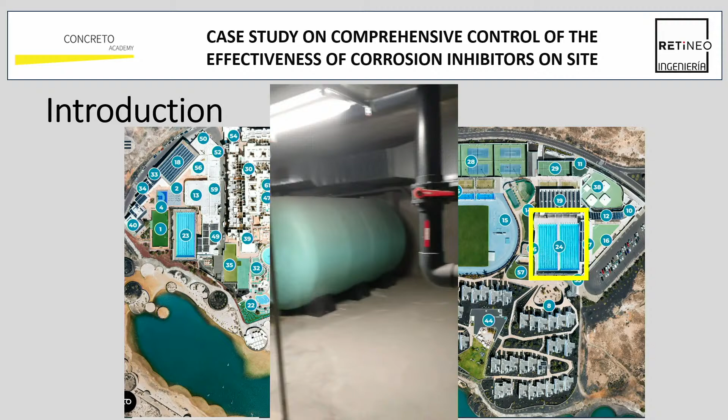So this is the central gallery between the two swimming pools. You can see the state of the concrete. It had a lot of leaks, a lot of leaking, as I was saying. These are the pumps and all for the swimming pools and for the whole hotel. These are very big galleries, but they are full of conduits, pipes, and services. This is the lateral gallery, and all of the water of the swimming pool, because of a lack of waterproofing, was leaking through the concrete. I think with this you can have a more precise idea of the site of work.

Let's go to the first phase. As I said, it is the inspection and the pathology report of the structure. This is a very critical phase of the project, because it's where you have to define the causes and the consequences of the damage in your structure.

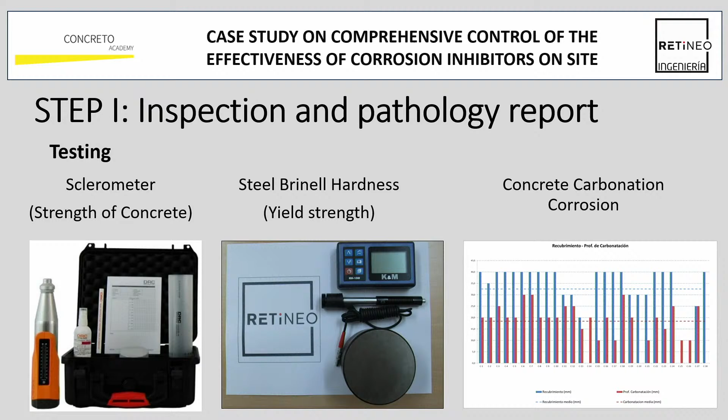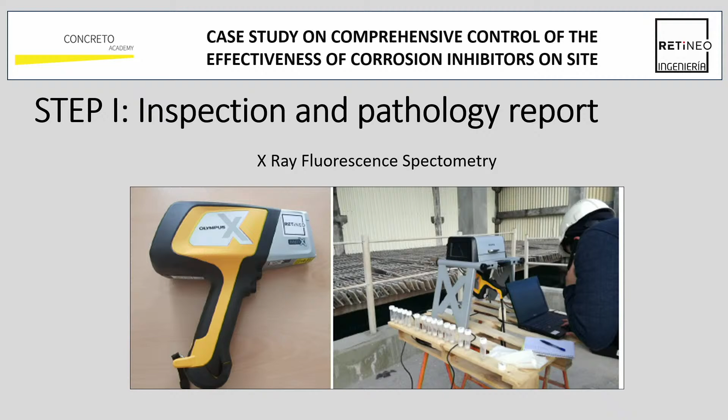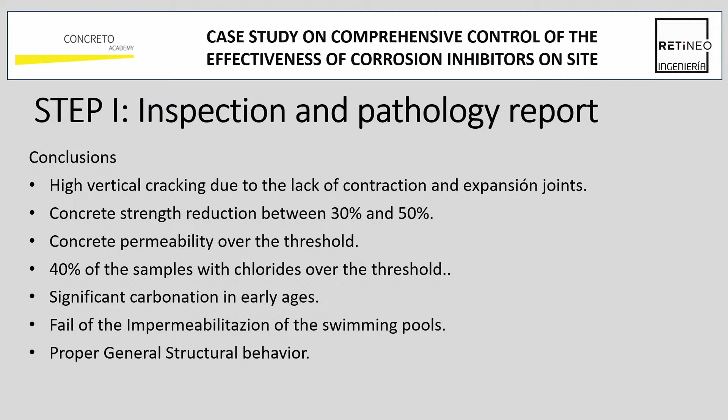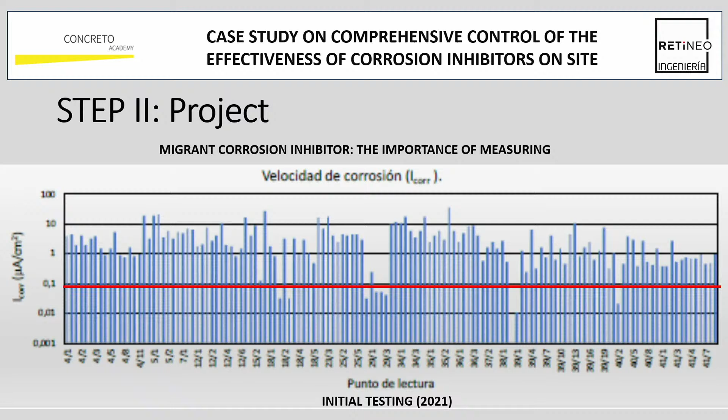And this was Carmen's idea. I say it at this point of the project because it was not a decision that my company made - she did it with Jesus, both. And well, it was so important that after some years, we will see it now, the points lowered completely the corrosion rate, which was the aim of the work.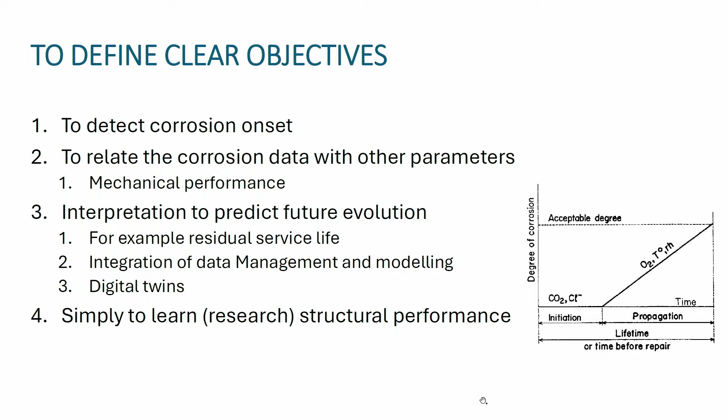As a fourth objective, and I think this has been very important for me, is simply to learn how structural performance is, how corrosion is developing, with a level of detail that you don't have with periodic measurements. For researchers, it's very important to learn the performance in real conditions.

The parameters and techniques, when you mix them, you have the sensors, the known sensors, what we can monitor related to degradation. It has already been mentioned, the need to have electrochemical techniques and electrochemical sensors for potential, for resistivity, and corrosion rate.

And why is it so important? There are several techniques to measure different parameters, but the most important for corrosion is electrochemical techniques, because corrosion is an electrochemical process. In that case, all other types of techniques are indirect measurement. Only if you have an electrochemical technique, which is in the same mechanism as your process, are you able to derive the best result.

I say that because it has been tried to measure corrosion through acoustic emission, through ultrasounds, through magnetic fields, and so on, and these are not electrochemical. They are informing, but they have empirical relations with the corrosion. The only techniques that have a direct basis in corrosion are the electrochemical ones, and there are these three.

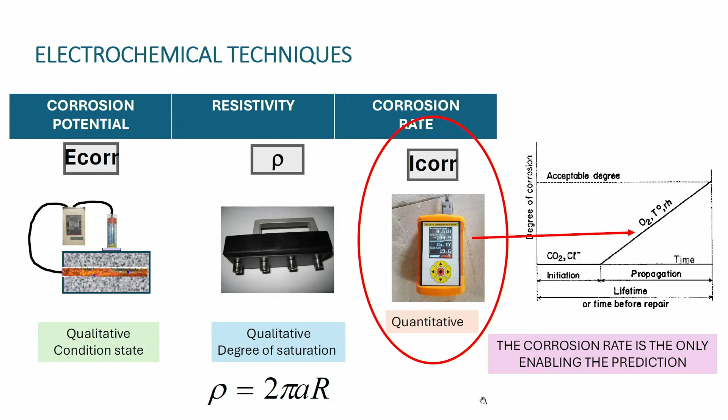On reference electrodes, very quickly, there are several reference electrodes that you can embed in the concrete. For the potential, manganese is the most stable, copper sulfate or silver chloride. Each of them has a different reference value, and we have ranges to conclude whether the corrosion is low, medium, or high, but that is qualitative, and they are attached to the bars usually.

For other types, I have summarized: for temperature, it's typically platinum or a thermocouple. For humidity, it's necessary to distinguish relative humidity in the air from liquid water. For liquid water, we have a small piece of gypsum with two different metal bars inside, and when water is present, there is a difference in potential or a current circulating. Vibrating gauges are used for the mechanical measurement of expansion.

For resistivity, we may have a 2-bar or 4-bar sensor. And for the corrosion rate, we have different types of sensors with different geometries, and we may produce integrated systems.

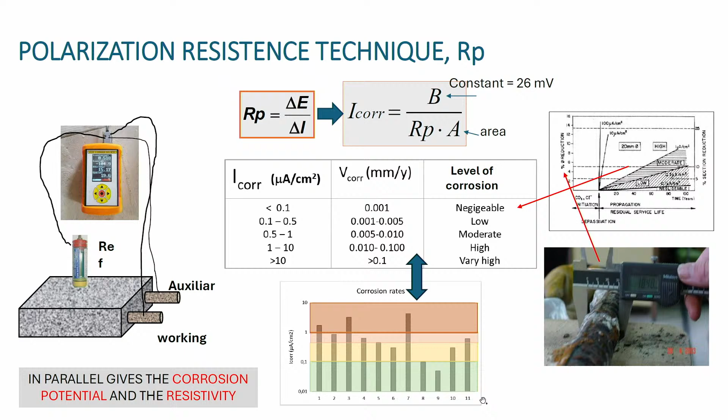But what happens in real structures? In a real structure, when you apply a current, you need a small counter electrode, and the current is not confined there, it spreads and vanishes along the bar, because the bar is much larger. In that case, we lack a precise area.

This is the key point with commercial techniques: you need to be sure they are able to account for the area. Otherwise, the measurement is not correct. They have errors.

And how have we done this? We patented, Geocisa patented in 1990, and now—I will say more about that later—we patented several methods to measure that. This comes from Feliu's work in one of my corrosion masters.

One method is to measure how far this current goes. You can place several reference electrodes beside the counter and the central electrode, and measure how far the current goes. In that case, you can obtain the total area that is affected.

We call that the attenuation of potential method. The other is to confine the current, which is what is done in GECOR 10 now, using a guard ring, like a Faraday cage. You apply a counter field electrode, an electrical field electrode, and confine the current. And to be sure you are within this confined area, you need additional reference electrodes to control it.

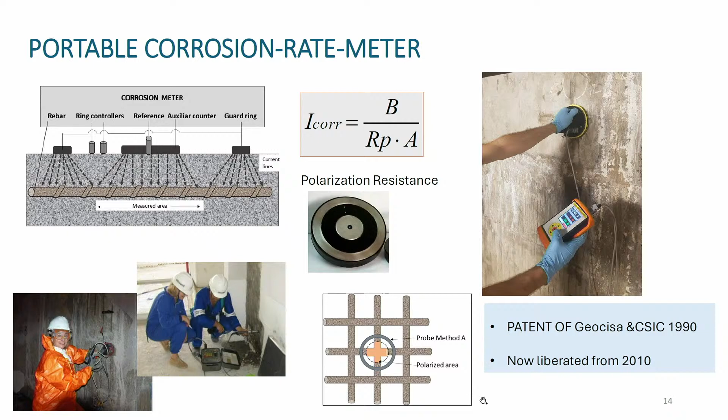And you need always to account how much steel bar you have below this circle, that is between these two discs there. And this is a correct confinement, but if you don't have confinement, the current may go in this manner.

The other main constraint is that you need to wait a time, because when you apply the current, there is a transitory period lasting about 30 seconds. If a technique measures before that, it will give erroneous results because you are still in the transitory period. You need to go until the signal is constant and you are in a steady state condition.

The other difficulty is that the corrosion rate changes with the weather and with the moisture condition. We have collected data now for almost 30 years, measuring along the year, and we detect the seasonal changes of temperature and humidity, the raining periods, and how to manage this.

Then you need to integrate the area below each time, and you obtain an increase in the loss of section or the loss of diameter that is similar to that foreseen by Tuutti. That is almost linear, the increase of the depth of corrosion with time. I have no time to say too much about that, but that is very critical. It's not only the corrosion rate that is important, but also the collection in time when you need to record.

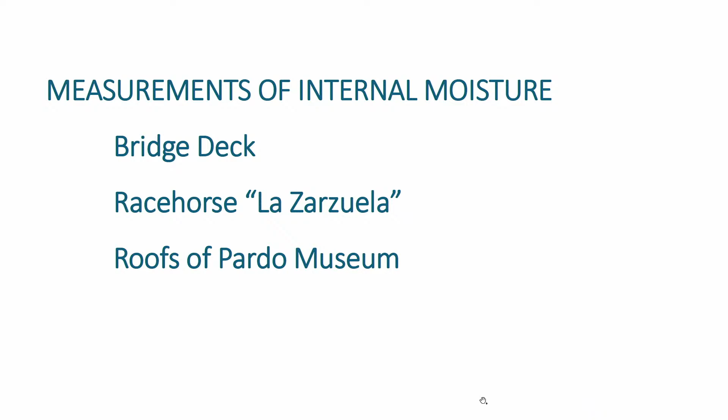This is a bridge within a Spanish project from the Ministry of Transport. They were interested because they found that between the asphalt layer and the concrete deck, they had a lot of degradation, and they lacked understanding of what was happening there.

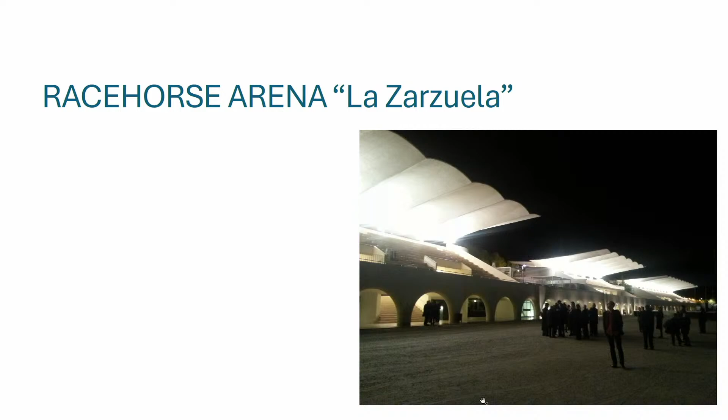They were the designers of the rehabilitation, and they found a lot of shrinkage cracking, a lot of cracks, and they really tried to obtain again the monolithism in the shell, with a lot of injection of the cracks.

Well, we were dealing with the corrosion. We did first a survey with the corrosion rate meter, measuring the corrosion rate in all these parts, and we applied different levels of corrosion based on the corrosion rate.

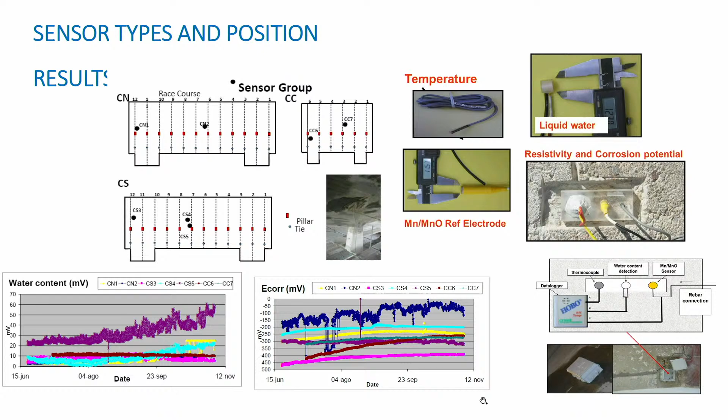There are several results we don't have time to comment on, but I assume the people at the Institute are continuing to record and analyze the results.

On the Prado Museum, this is not exactly concrete, but I thought it could be interesting because it's the Prado Museum. We were really fascinated with the case. There was a leaking, so they changed the roofs and recovered the roof in lead, instead of tiles, substituting it with the original roof.

The original roof in the Prado Museum was lead, but this was removed during the Napoleonic War, when they used it to make projectiles. After that, they put tiles, and in this rehabilitation they tried to recover the original lead roof. The problem is there are a lot of small details, and it appeared there was a big leaking.

The leak was in the room where Las Meninas was exhibited. We were immediately asked by the Ministry of Education at that moment, which culture depended on. It was Mariano Rajoy, who later became president, and he asked the institute to make an assessment.

There was a group of architects and engineers just looking at the roof and the type of problem, but in our case, since we work on durability, we convinced the ministry to install several sensors in the different layers of the roof.

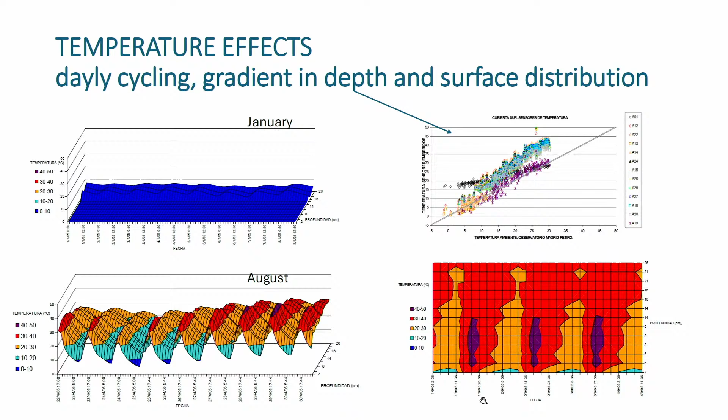And here is the comparison between the external ambient temperature and the internal temperature. I am finishing - this was the case to detect the passivation.

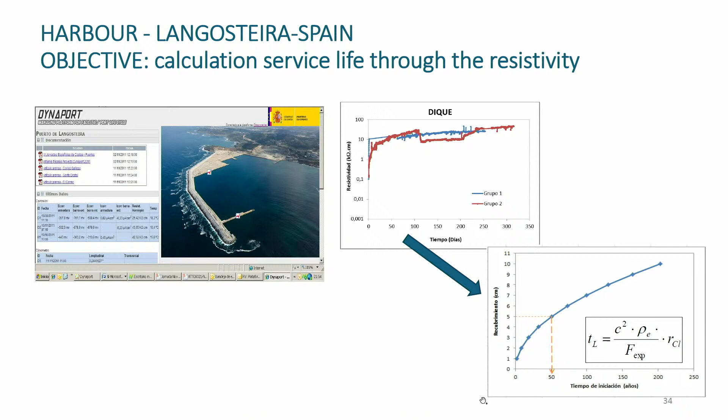And I would like to finish with this, my oldest case, in El Cabril of Enresa, where radioactive waste is being buried. For the radioactive waste storage, they use big concrete containers, 30 by 30 meters, which inside hold small containers where drums with the radioactive waste are introduced.

They bring this from different hospitals and treat it, and afterward introduce it here. They want to know how the performance of this buried concrete will be. It's the only case I know where corrosion in buried conditions has been studied, because they want to know what may happen during the 300 years this is going to be in operation.

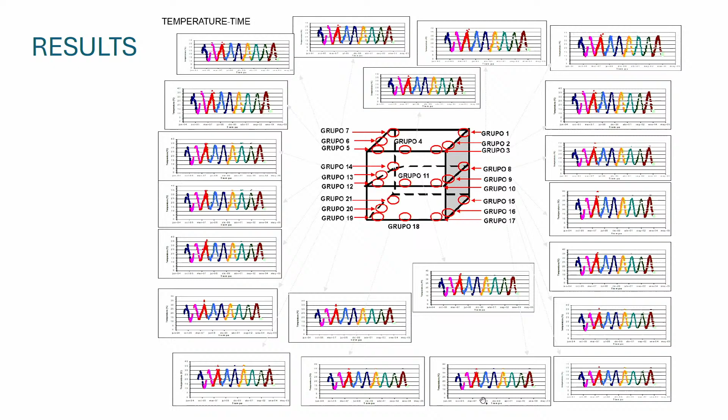We instrumented one container - besides the buried container, we installed sensors for measurement, and this is what happened. Temperature is very important - you see all the seasonal changes, and they are important. It depends on the depth, this is 2 meters, not too much, but it's detected by the difference there. I am finishing.

And these are resistivity and temperature, that resistivity versus temperature, in order to have the activation energy that is very important for predicting climatic change, because if temperature is going to change, we need to know how the different properties change with temperature, and you see that in upper part and lower part is completely different.

And the data treatment to make average values, that is an Arrhenius plot with the activation energy. Key point: activation energy is not the same, it is evolving with time, and also is changing from some parts of upper part and lower part. In that case, to predict based on Arrhenius law is very uncertain, because we don't know the precise activation energy.

To finish, to define clearly objectives when you are going to monitor, calibrate the sensors with external, either humidity, corrosion rate with the corrosion rate meter, and we need to learn much more to be able to predict the effect of climate and climate change.

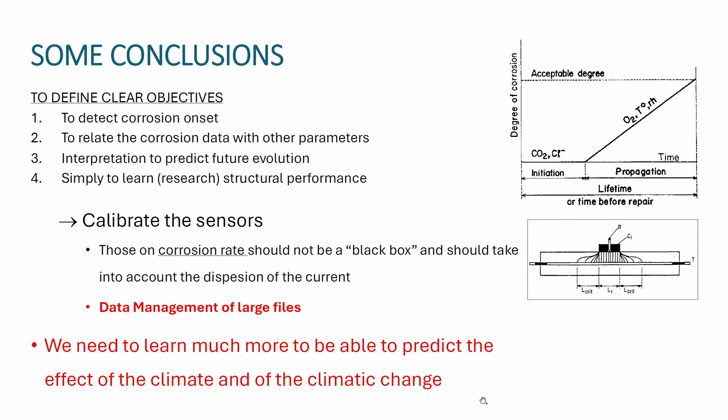And this is my last message for you, the young people. We have models for the ambient. We know that the water content is critical, but we don't have the function to predict the amount of water inside the concrete from the climate.

Any publication saying that they are going to predict the behavior, if they don't have this function, they cannot predict. And if we increase the temperature, we are detecting in Spain, we dry the concrete, and that means less degradation and not more corrosion. And this is my last message for you.

To predict the climatic change is important, it's a challenge, but we need to make it rigorously. Otherwise, and I say that because there is a joint research center document that is not taking into account that function. In that case, it's a pity, because you need to be very rigorous for just predicting more corrosion if you are going to have higher temperature. Okay, thank you very much.